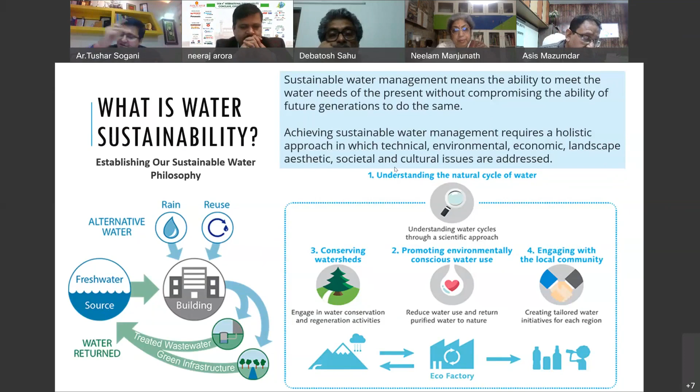And what is water sustainability? Sustainable water management means the ability to meet the water needs of the present without compromising the ability of future generations to do so. Whenever we talk of a building, there's always a natural cycle of water. In a building, water comes from various sources: from the rain, from the reuse of water, and finally we keep the water. Our intention should be to give this water back to Mother Earth, from where we got it. This is the cycle of water we need to work upon.

And the most important thing is how to save water. Very, very important for us. Because if we do not conserve water, as I told you, by 2050 we'll have a very alarming situation.

We need to not waste our water on the plants. We need to grow the native plants that actually become water free after a certain period of time. We should use water cans instead of water hoses or sprinklers, which actually create a lot of water wastage. We should install an efficient water system.

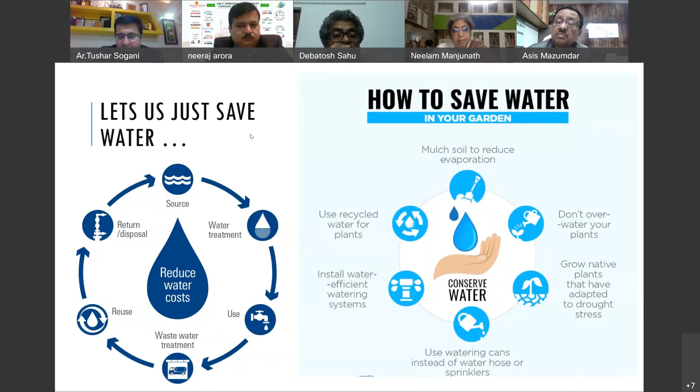There are a lot of ways to save water, which we have always been talking about, and I think my speaker is going to talk about that. And the most important thing is that we should understand, we should make it very simple, what are the simplest 10 ways of conserving water. We need to install low flow plumbing fixtures, which actually consume less water. We need to use grey water for irrigation.

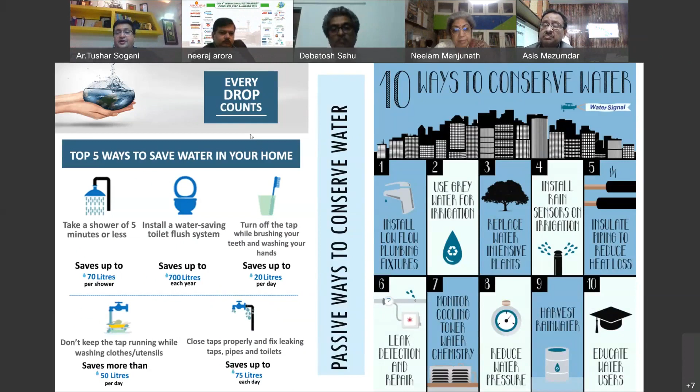We should know how to replace water intensive plants. We should install rain sensors on irrigation. We should insulate the piping to reduce heat loss. We should talk about leak detection and repair. We should monitor cooling tower water chemistry, and we should try to reduce water pressure. We should try to harvest rainwater. We should educate the water users.

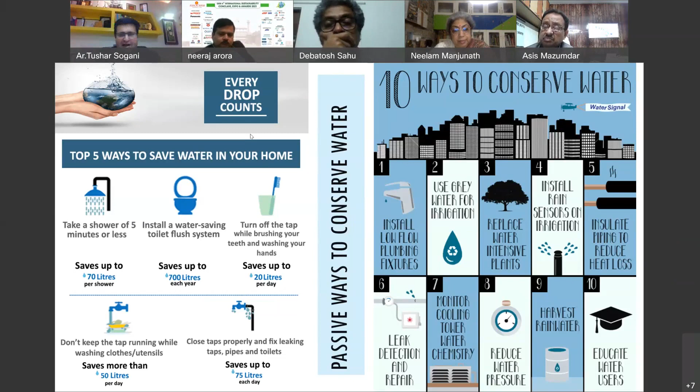I think in today's seminar, we have stalwarts like Professor Asis Mazumdar and Neelam Manjunath who are going to talk. So I think it's high time that we listen to them, and we really work on water management with passive measures and try to conserve water, which is a threat to us.

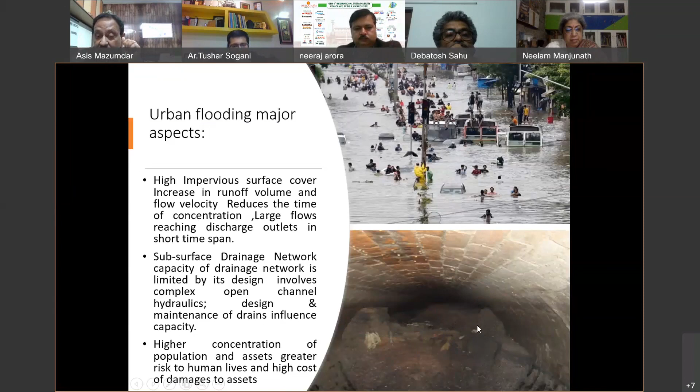Now the subsurface drainage network capacity also is limited. Limited means, with time, it is sometimes getting choked. I am showing a figure just below. If you have a look on it, this is a man-made sewer in the Kolkata area, in South Calcutta, where we visited during that point of time. KMC invited me, and later on they jacketed it with a GRP lining. Now when they removed it, we found that more than 80 to 90% was totally blocked with the deposition. So these are the other factors.

Now, if we see the urban factors, one is our global climate change. Already at the introduction, the speaker has mentioned that we are having a change in weather pattern, and most importantly, we are now receiving high intensity rainfall for a short period of time, and that is causing the flash flood, and that is causing the difficulty of regulating the flow.

How we can regulate the flow, how we can regulate the control, the drainage, that is another problem. So to drain it out, we need some time. So we need a certain way that, first of all, the intensity should not be very high, but at the same time, it should give us some more time, distributed over time. And that is very, very important.

And now you see in urbanization, all of us know what the problems are due to the developments taking place everywhere in a city. Improper and inadequate drainage system is an indirect cofactor which can cause the urban flood. And improper or no solid waste management is prevailing, basically. And that's why we are throwing everything into the canals, which is blocking our grit chambers, and ultimately it reduces the navigability of the carrier of the canals and our khal, whatever you call.

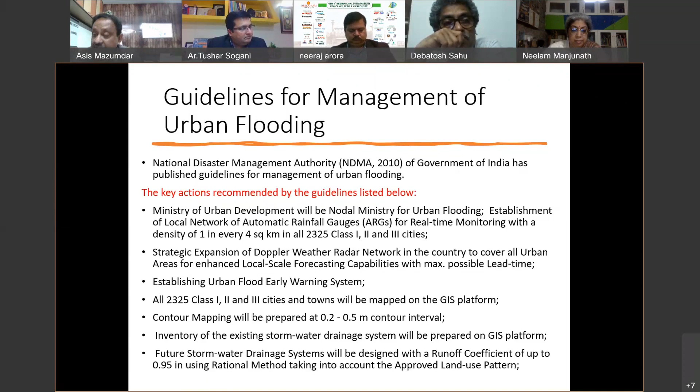And now for future storm water drainage, if you go by that, it should have a runoff coefficient of 0.95. You can understand how fast this is taking place. Earlier, it was really less. Now it is 0.95 of the C value. Whenever we find the discharge by the rational formula, it is dependent on that particular runoff coefficient, which is 0.95 here. So you can understand what amount of water is coming.

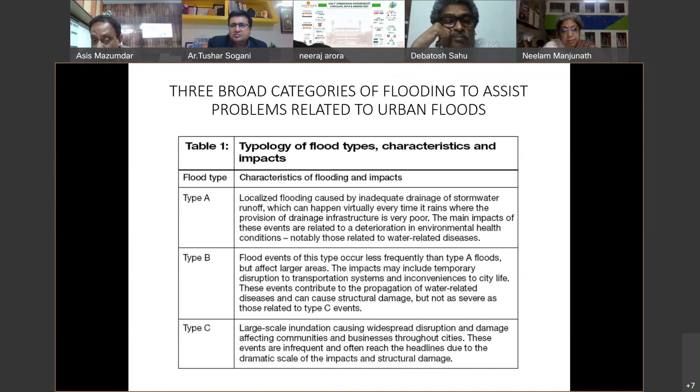And then we can divide the total flood in urban areas into three types: type A, type B, and type C. Type A is localized flooding caused by inadequate drainage of stormwater, whereas type B flooding events occur less frequently than type A floods, and particularly the impacts include temporary disruption to the transportation system, which we experience many times in most of the metro cities of our country. And there is type C, which is large scale inundation causing widespread disruption and damage. And nowadays, even type C is taking place to a great extent.

And even the local ponding, kindly excuse me, my architect friends, I know very well that sometimes it is needed for the development. You might have to go for some of the natural water bodies whenever some sort of development takes place, but we should try to keep as it is whatever water bodies there are, because these act as an impounding reservoir for minimizing the peak of the urban flood.

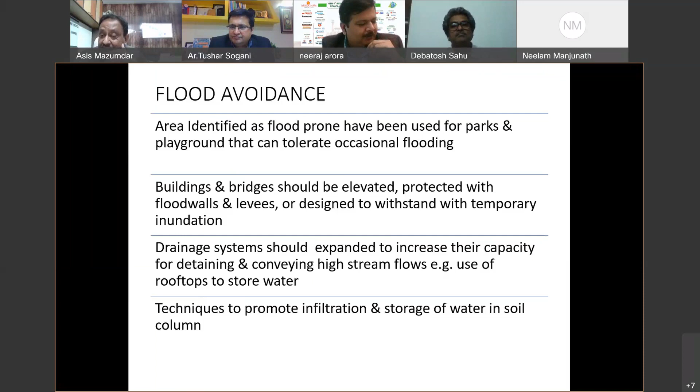Techniques to promote... Ashish ji, yeah. Sir, I'm sorry, but we are running short of time. Out of time, so yeah, please, if you can complete in some time. Yeah. Okay. Thank you so much, sir. Okay, thank you. Surely, I'm trying to do that.

One or two things I'd like to discuss that are very, very important. For any rainfall event, the frequency or return period of a storm event is very, very important, which can be defined as the average recurrence interval between two successive events equal to or exceeding a specified magnitude. Thus, if it is stated that the return period of rainfall of 20 centimeters in 24 hours is 10 years at a certain station A, it implies that on average a rainfall magnitude equal to or greater than 20 centimeters in 24 hours occurs once in 10 years.

Just I'd like to mention, in Kolkata city, the Britishers who designed it did it for 6 centimeters of rainfall, and the frequency of rainfall, that is 2 times a day. So if it occurs, obviously the designed drainage system can take care of it. But if it exceeds the value of 6 centimeters of rainfall, or if it exceeds more than 2 times, it is obvious that there will be waterlogging. That we need to understand.

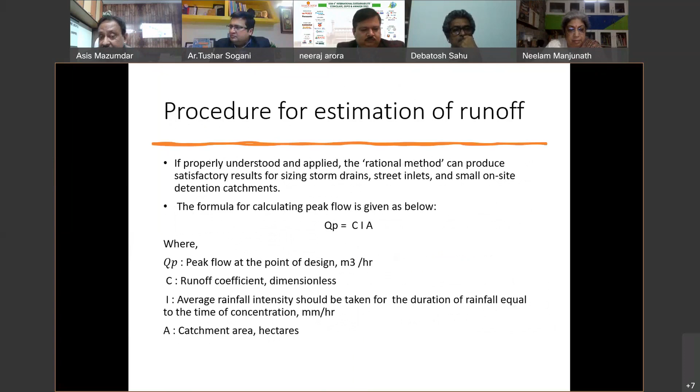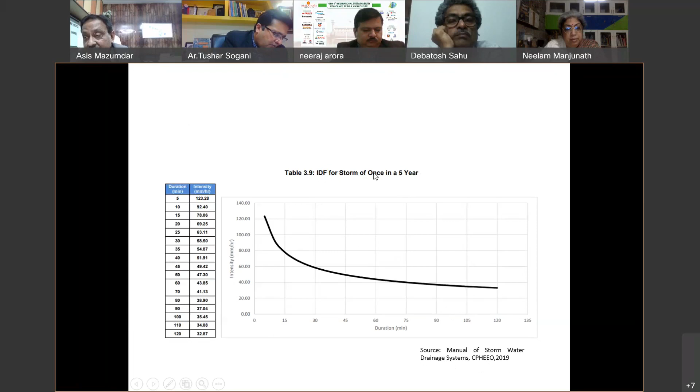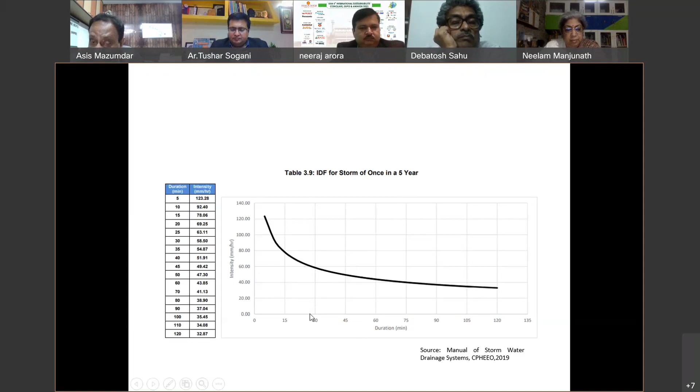If a storm takes place once in 5 years, that means this much of magnitude takes place once in 5 years. Let me say, if the intensity of rainfall is 60 millimeters, then you can say approximately 28 minutes of duration you can expect. But whenever you are trying to do something with a duration less than 15 minutes, then you might have 100 millimeters per hour of rainfall.

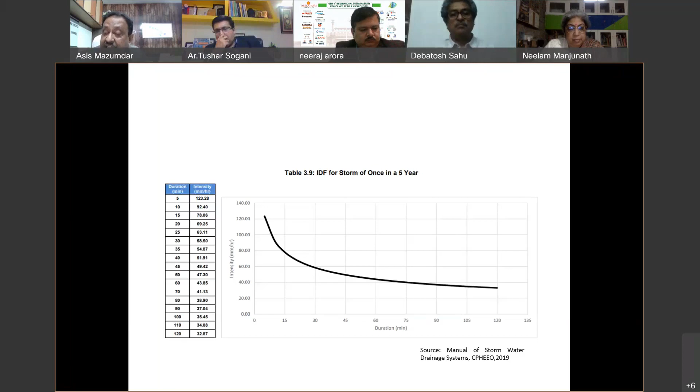So just try to understand, whenever I am designing something, I have to design it for 30 years of data, and I have to take a certain frequency of occurrence of the rainfall, like once in 5 years or once in 10 years, or more than that. More than that means if I want to get to a safer condition, the problem is that your pipe, your drainage system design will be too much to take all this into

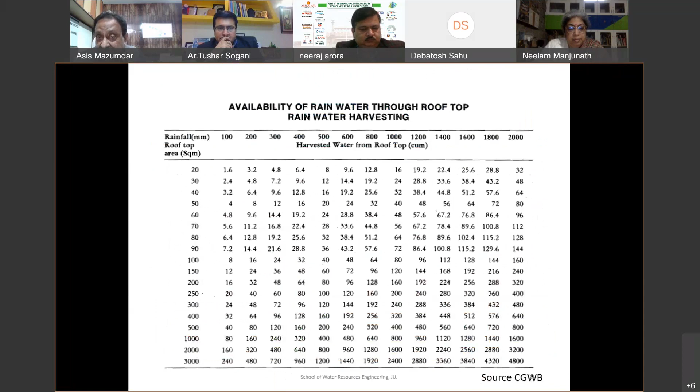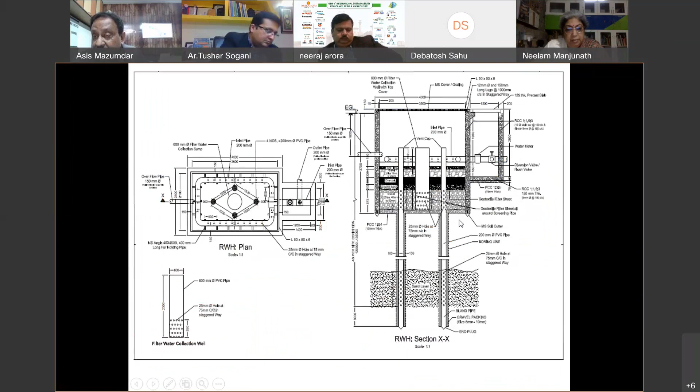account. So one very important thing I'd like to touch upon is rainwater harvesting, and these are very good guidelines nowadays. But rainwater harvesting should be done to the aquifer from where the water is exploited, that means withdrawn. We should recharge it to that extent only, and our recharging should have a basic filtration initially to get rid of the basic impurities. And later on, through the layers, it automatically gets filtered.

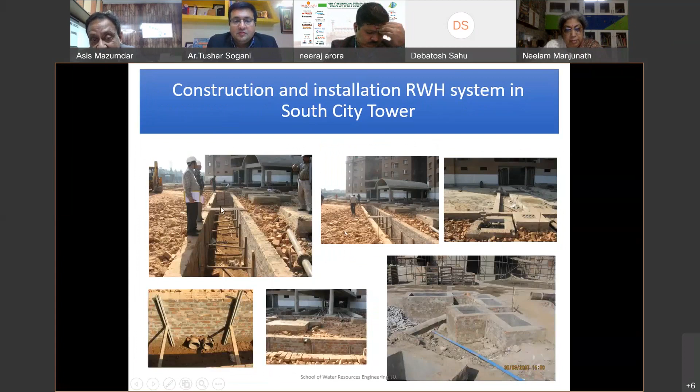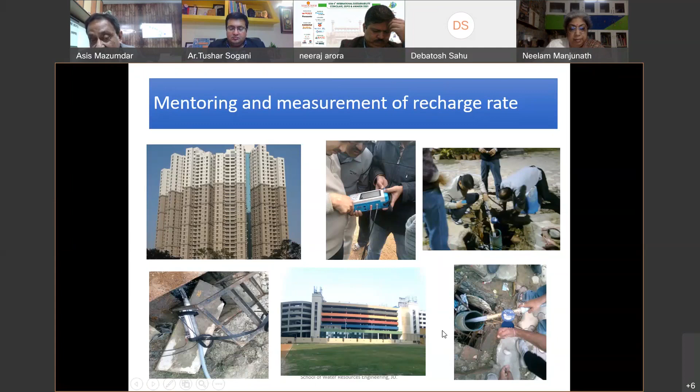Now, the construction and installation at South City Tower, which I designed in 2007 and 2008. This was the first time, and we recharged it, and I tested it a long time after its installation. Whatever design rate I had calculated, I artificially made the rainfall, triggering the water there, and I got a very good response, more than what I designed. So these are the different things that we can do here.

Just another example, in the Dum Dum area of our Calcutta city, there is a housing complex. I should not mention its name. It discharges into the Bagjola canal, which is one of the very important canals of Kolkata. If we do rainwater harvesting, at least during very heavy rainfall, we can have 3,600 cubic meters of harvested rainwater. We can hold it for some time, and we can also recharge it.

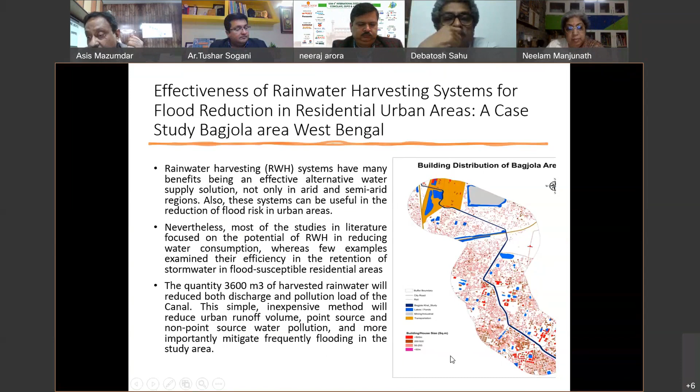So you see, this could help, and ultimately when we release this water, it will give a better input to the Bagjola canal as better water, which can reduce the pollution load or help to assimilate the pollution load of the canal. So that's why I am telling you, it helps the environment also.

That was a real insight into water management in terms of urban flooding. I'd just like to cite a condition in the city of Jaipur in the year 1981, when our walled city, which was planned in the year 1726 by the then architect Vidyadhar Bhattacharya, who was not a qualified architect.

And when Jaipur faced it, the average rainfall in Jaipur in July and August is almost 180, 190 mm, but that time it was 500. And you will believe, sir, that because of the way in which the drainage system was planned in the year 1726, nothing happened to the walled city, but the outer city of Jaipur was devastated like anything. So I think this was the thing, that our ancestors actually planned the water management through passive measures.

We architects, we designers, we engineers really need to learn. And I think whatever you mentioned, how to overcome the urban flood and manage water, is a point of concern where we are thriving. We can't wait for the condition that happened in Cape Town 5 years back. We don't want this in any part of the world. So I think we should definitely thrust upon all this.

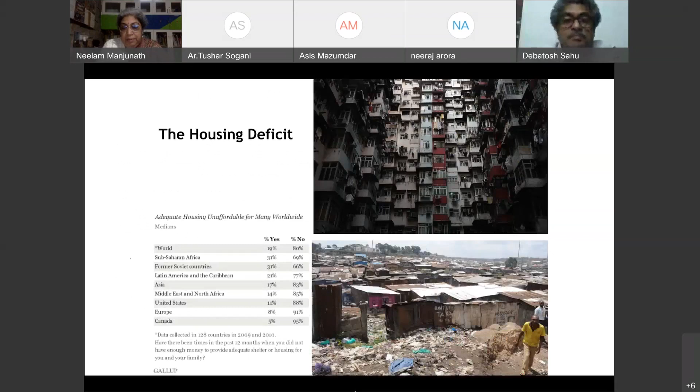Now, the Population Division of the United Nations Department of Economic and Social Affairs predicted that the urban population would grow to 6.4 billion by 2050, and I think 37% of that growth will come from three countries: China, India, and Nigeria. We are in the part of the world where we have the housing deficit, and there are different kinds of housing deficits. One is that we don't consider the environment-friendly houses of mud, bamboo and local wood as houses; they are considered non-houses. And especially in the cities, we have that pigeonhole kind of construction, which is called development most of the time. The construction sector, as we know, is a major contributor to the global economy and also to global warming.

And why is it so? Any country's development is measured in terms of the amount of concrete poured in a particular year. We have reached a situation where these are the definitions of development rather than human development or the human development index. And the human development index is generally again taken as how much concrete was poured to provide them infrastructure. So this is the kind of development that has happened, and that, as we know, is quite

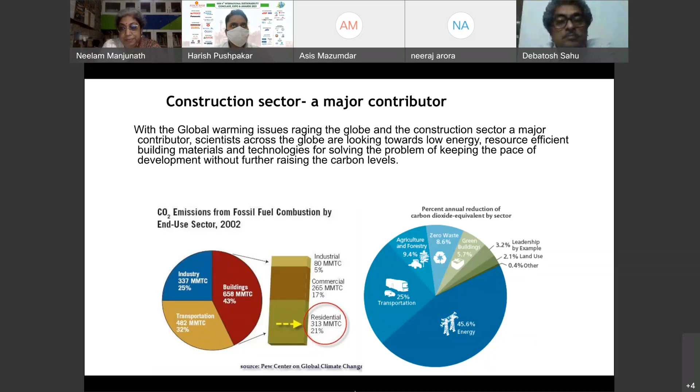lopsided. From the construction sector, we do more than 43% of fossil fuel combustion. But when it comes to green building, which we have been talking about, and urbanization also, it's just 5.7%. So that's the kind of gap that we have. And this is a little bit of data on water extraction and the building industry in a report released by Down to Earth.

The world extracts approximately 145 cubic kilometers of water every year, and the building construction industry is one sector which consumes a substantially high amount of water every year. For every 1 square meter of wall construction, an average of 350 liters of water gets consumed. So that's the kind of data that you have, and the quality of water for construction is the same as

drinking water. This is to ensure that the water is reasonably free from impurities such as suspended solids, organic matter and dissolved salts, which may adversely affect the properties of concrete, which is the sign of development, especially the setting, hardening, strength, and durability. And the water usage, if you can see on the right side, the pie chart: building construction, then automotive, electronics, and others.

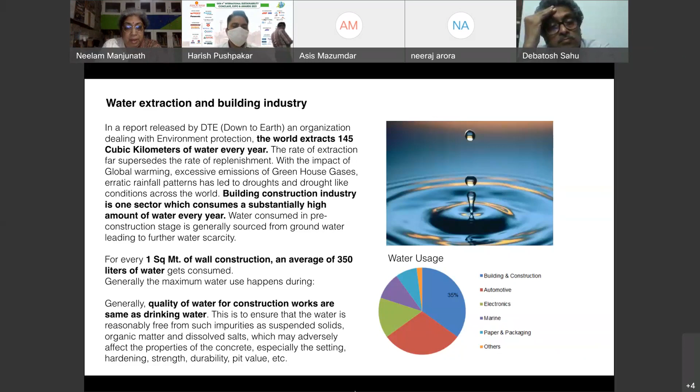The needs for water in construction are of different types. Water supply may be readily available in some locations; in other places it is inaccessible. So given that water plays such an important role in many on-site processes, where can site managers turn if they have a limited supply or no supply on-site? Bringing an alternative temporary water supply will ensure that you can deliver those key services.

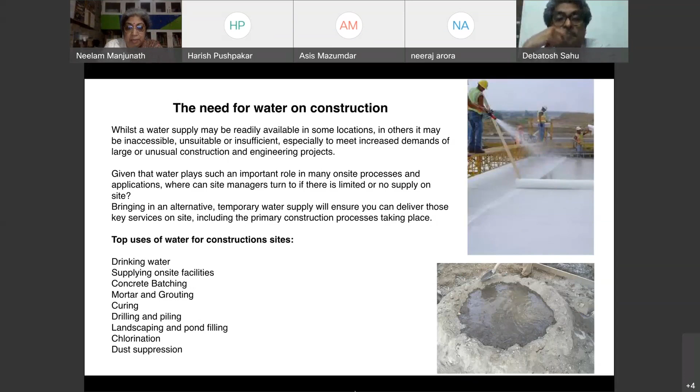I will try to talk in the context of Bangalore, and again take it to all the cities that I would be talking about. Thanks to all the so-called development that we have in Bangalore, the IT city and the Silicon Valley, we will be touching 2 crores population shortly, and we have an IT sector with millions and millions of concrete and glass buildings built with high energy guzzling materials.

And very recently, we have been told that there's a design district coming, something like a Dubai thing happening in Bangalore. When ITPL started, we saw sudden change in Bangalore. Now we have another one that is supposed to be coming. How do we make the city water and energy secure while providing the basic needs of housing, food, electricity, and water?

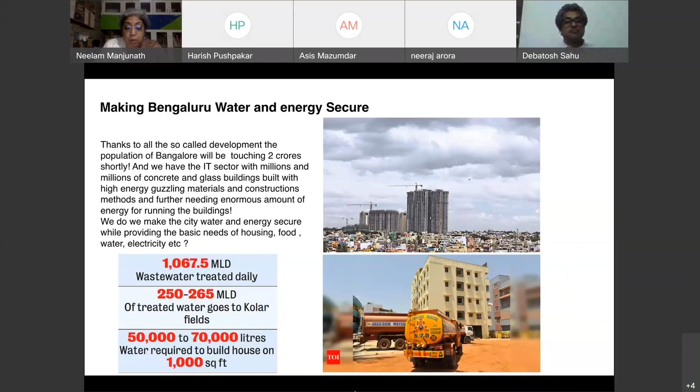This is the kind of wastewater treated daily in Bangalore. And this is the treated water that goes to Kolar Fields, which is close by, for the factories. And 50,000 to 70,000 liters of water are required to build a house on 1,000 square feet. And how much water do we actually need? This is another thing which we need to look at.

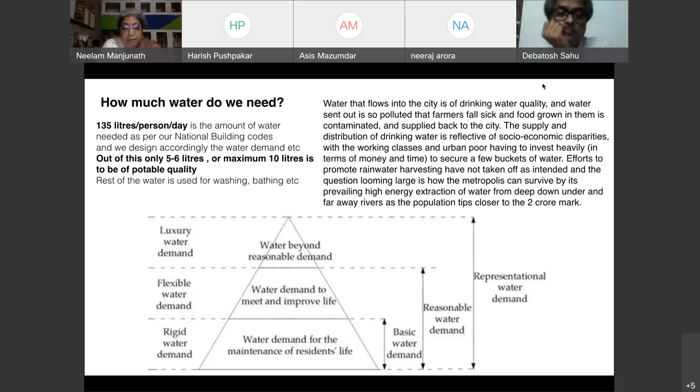And how do we actually solve this, that we are able to supply that critical 10 liters of potable water, and all the other water can be treated water and other water, which can be used for the other purposes? And how do we actually go about it?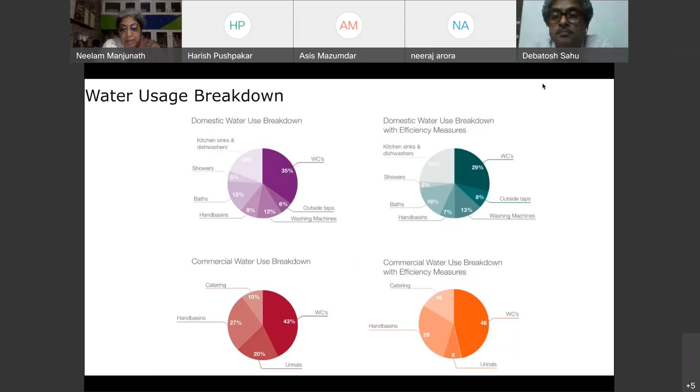And the commercial water use breakdown, if you can see: catering, hand basins, urinals, WC. And again, in the efficiency measures, how efficient are we generally in actually doing that? So in the WC, some work has been done, where maximum water goes, but in all the other areas, not much has been done probably, and that also needs some kind of a thing.

Now, if we are building buildings for simple living, because I always talk and try to see the measure from basic living. How do you design spaces and buildings to fulfill the basic needs of a shelter to perform various activities, be it an office or a house? And what should we do actually, if I just list it down?

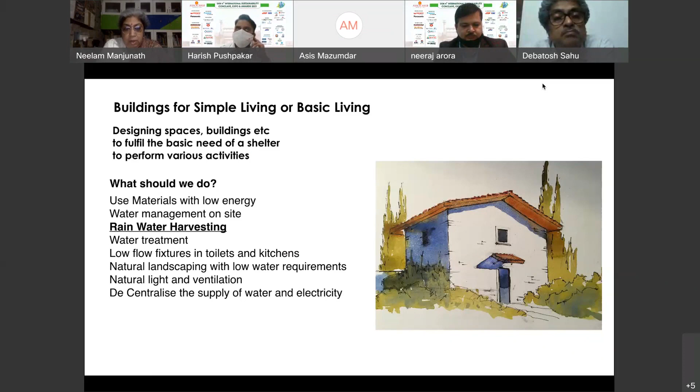Use materials with low energy, water management on site, rainwater harvesting, all these kind of things. I think other people have also spoken. Natural landscaping, and decentralize the supply of water and electricity. I think this is another factor which is very, very important. Today, I'll be concentrating only on rainwater harvesting. I will not take much time.

Now, there's one thing, I don't know how many people are aware about this. What is the source of water on this earth? The only source of water on this earth is rainwater. Whether you call it river, you call it pond, you call it anything, the water only comes from the rain. So the only water source in the world is from the sky, and we have to catch it where it falls. It's as simple as that.

There's one more startling figure that we have as per the Central Water Commission. India gets 4,000 billion cubic meters of rain every year, whereas we need only 3,000 billion cubic meters of water every year. So what actually happens? Why are we still short, where does the problem actually lie? And by 2030, the demand for water in India will be twice as much as the supply. This is the kind of figure that we have.

And according to the Composite Water Management Index released by Niti Aayog, this is going to be twice of what we actually have right now, and that will be the water for hundreds of millions of people. The potential of rainwater, if I talk about Bangalore, is a very simple diagram that I have shown. I will not go into technical detail because a lot of technical data is available. You have diagrams available, but still, why is it not really happening and why is it not working?

We have in Bangalore, this is the annual rainfall. This is the kind of rainfall that we have. If your roof is around 2,000 square feet, you can collect 180,000 liters of water a year in Bangalore, and you can actually live off the water grid very, very comfortably. I've been living like that for the last 13 years. Even if you collect half of that, you're quite well off.

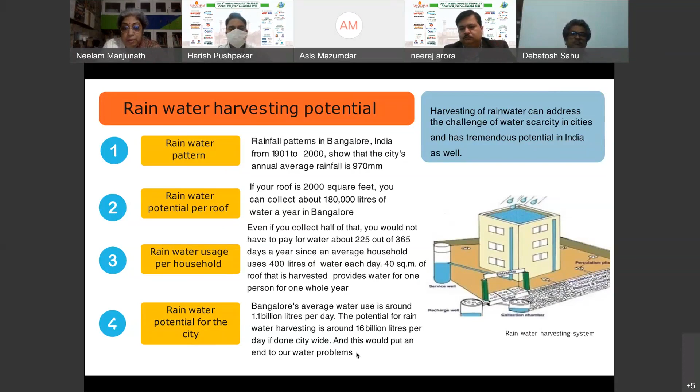And the rainwater potential of Bangalore city is around 16 billion liters per day, which is the potential we have to harvest. What we use is 1.1 billion liters, whereas the potential is 16 billion. And this could put an end to our water problems. And we have a lot of rainwater harvesting management systems. And when we talk about systems, immediately everyone talks about a lot of paraphernalia of technical gadgets and things like that.

Just now we had the example of Jaipur and Rajasthan. We had such good water management systems available there, groundwater recharge and water bodies, all these things were already there. And these rainwater tanks that we are doing today were there earlier. We have closed them, and so we have to do them again. We just cannot fight nature. You have to live by it.

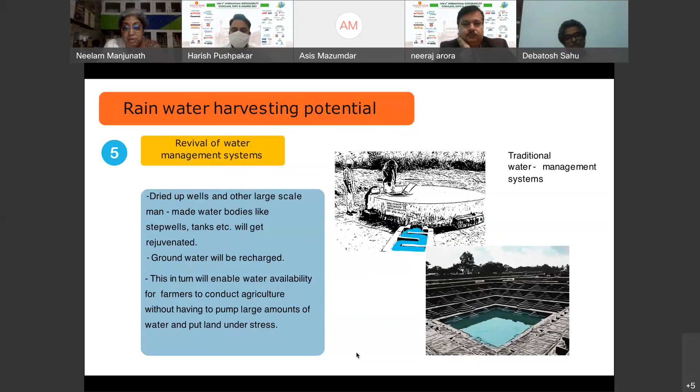So if we are doing these kinds of things at the level of water management systems, this will enable water availability for farmers in the villages and agriculture in the rural and urban areas, without having to pump large amounts of water and put the land under stress.

Limitations, I will not go into too much detail. What are the problems? The lack of awareness of sustainable ways of saving water, the lack of quality rainwater harvesting installation systems, the dearth of good servicing professionals. I have a rainwater harvesting system. I am doing it, but still there are some problems. I never get a person to service it properly,

though I have been trying to promote it for such a long time. Traditional skills of craftsmen who dig wells and make ponds have become redundant in the urban setup. That's another problem. And there are a lot of skill sets required to do this: planning skills, good craftsmanship, design engineering, entrepreneurial skills.

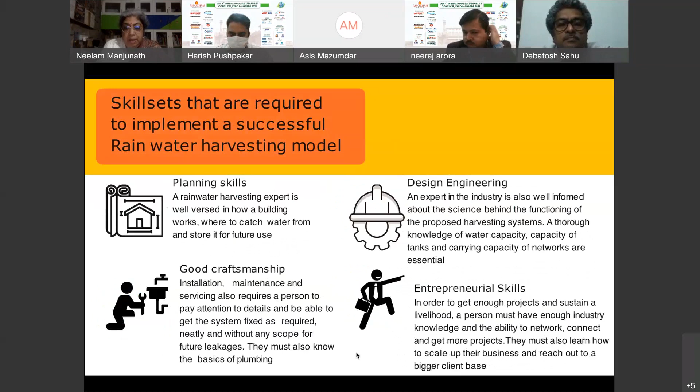But one of the basic things which I have not put in here is, in Bangalore, we get water from Mysore. It is pumped all the way from there at 97 rupees per kiloliter, and it is provided to the citizens at 7 or 9 rupees per kiloliter. Why would anyone do rainwater harvesting? You tell me. For doing rainwater harvesting, you are given some subsidy, like 200, 300 rupees a month or something like that, whereas you are already given so much subsidy, from 97 to 9 rupees.

Why would one do it? That's another policy issue, which could be solved by giving people potable water at that kind of rate, maybe 7 or 9 rupees, which is absolutely essential, or even free. But over and above the basic demand, the rate of water should actually increase exponentially, and that's where we probably will be able to do that. That's one thing.

And as I said, enterprises are not there in the rainwater harvesting sector. You keep looking for them, you don't get good people, you don't get servicing people. It's very, very difficult to maintain. Because it's mandatory for the plan sanction, people build a rainwater harvesting system, but 95% of the time it will be defunct. And that is something which really needs to be taken care of.